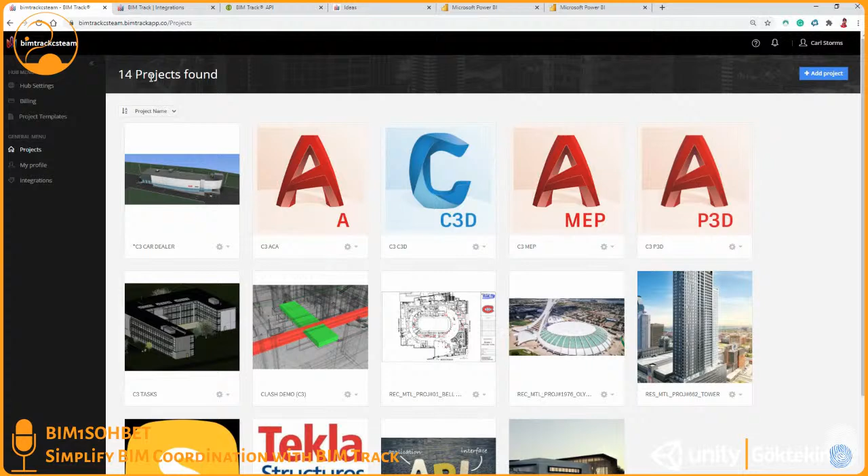So let me just close out of my screen here. All right. So what we should see on the screen now is the BIM Track Hub. And inside the BIM Track Hub, you have unlimited projects. So I currently have 14 projects that I can see, but there could be 100 projects in the hub. So I go ahead and hop into my demo project, and the first thing that we're going to see is our dashboard.

And here we can see all the recent activities. All of these blue links are clickable, so if you see something here you want to address, you can just click on it. We have what we call our mountain range view, and this means that we can see all of the information, how many people have been in the project on any given day, and then how many issues we have to deal with. But the real magic starts when we get into the issues page.

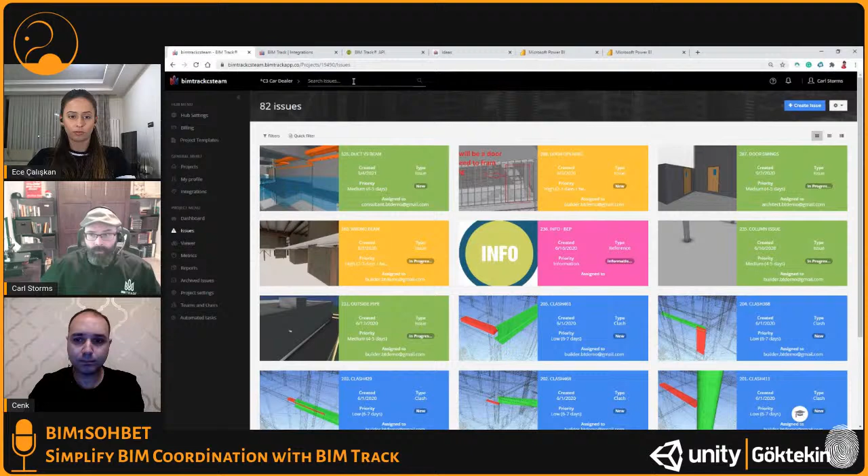So when I open up the issues page, you can see all of the active issues that are in the project. We're over 550 issues in the project, but a lot of them have already been closed and archived, so we're down to just 82 that are still active. And I can just scroll through and find the issues that I want. We can also use that search box to go directly to the issue we're looking for. And whether we type in the issue number or the name or a combination, we can be taken directly to that issue here inside of BIM Track.

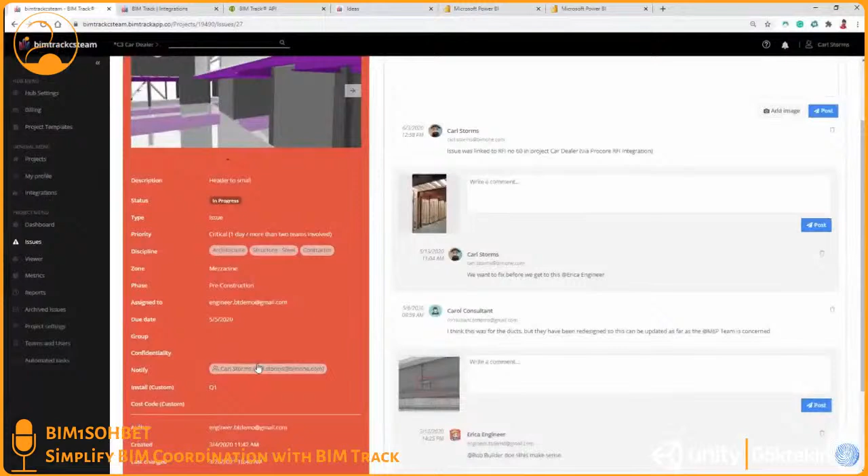And so once we see the issue pop up on the screen, we see the information that's part of it. So we see the image. We also see the XYZ coordinates, so where it was created. The coordinate system for your models is very important, so you want to make sure that everyone's using that same coordinate system. So whether it's pulling shared coordinates from Revit or whether it's part of your coordination process to say everyone should be in the same coordinate system, that's very important. And if you are in the same coordinate system, we're going to see that BIM Track is going to work as expected.

So we have all of the information that we've created when we started the issue. And then over on this side, we have all of the ongoing communication, all of the back and forth, the questions, the comments, the talk that's happened throughout the life of the project. At any time, we can use the @ symbol to bring in an individual person or an entire team into the conversation to make sure we have the right expertise. Along with unlimited projects, we also get unlimited storage. So that means with the attachments, I can bring on any file format that I want and share it here inside of my issue. And that gives access to anyone on this project that has access to this issue.

No, that's great, actually. So it's working very open. But I have a question: how many people can join this web cloud-based system? Are there any limitations about it? Yes, and that's a good question. So the way that the licensing works for BIM Track is it's a named user account. So essentially what that means is that everyone that's part of the project is going to have a license. So whether you have 10 people, 25 people, 100 people, the person that creates that hub, they're the ones that are in control of the licenses.

So that means if you have, say, 10 licenses, and during the first phase of the project you invite 10 people, and after a while we no longer need the plumber, you can take his name out of the project and put in the mechanical guy's name. So you have control over who has access. That's right, to move back and forth. So you can see how that works. So is it good to work with the same team for many projects, I guess? It really depends. For me personally, the more times you work with the same team, the better the outcome is. But we know in reality that's not always the case. And that's why you can switch around. That's right. And so that's why you can have as many projects as you want.

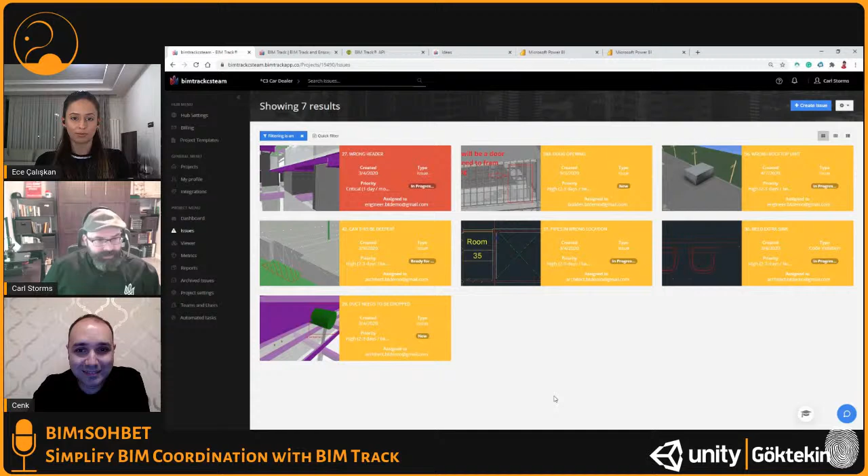Architecture. So that's right. And any way that I can access this, whether it's in Revit or Navisworks, I can see just these, so I don't have to sort through all of my issues on my platform of choice. I can get directly to the issues that I need.

And the one other thing that I want to mention before I move into the add-ins was, along with all of the integrations and add-ins and workflows, we also sit on top of a completely open API. And so essentially what that means is that if you didn't see an integration or a workflow that works for you, you can come in here, either yourself or someone that works with APIs and coding in your firm, and they can use all of this to extract data from BIM Track and put it into their application, put it into their workflow, very much like our Power BI integration.

So not only are we big fans of Open BIM, we're also big fans of Open API, so that you can add in. Yeah, great. That's great, really.

So if we carry on and we look at what it looks like inside of our add-in, so this is our add-in over here. And as we mentioned, we had 8 products where we had an actual add-in. It's going to look the same. So if you've seen it here in Navisworks, you've seen it in Revit, you've seen it in Civil 3D, and that's one of the things we try to keep, is to make everything very simple and user-friendly. So you don't have to learn a different add-in if you use AutoCAD and a different add-in if you use Tekla. It's all the same.

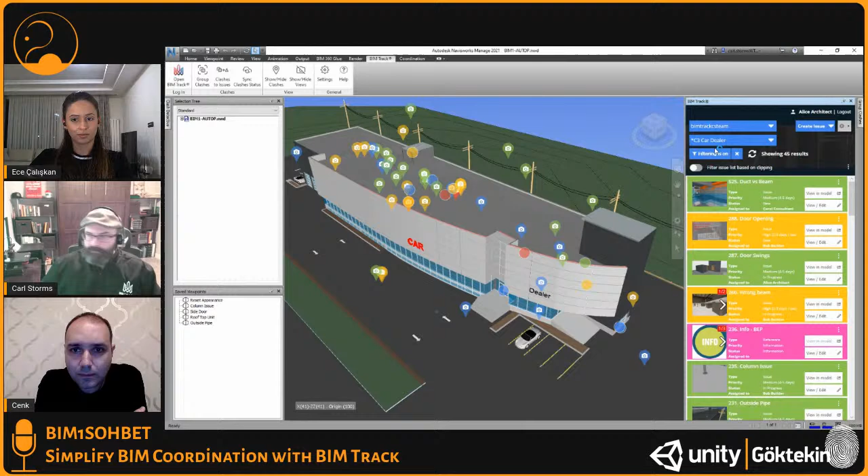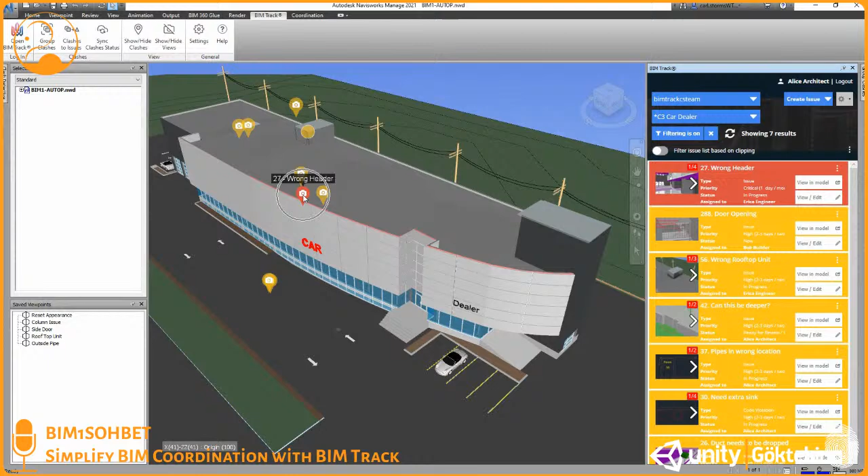And you just make sure you're in the right hub, and then the proper project, and then you see all of the issues available to you. And as we saw before, if I click on that same filter that we saw in the Web Hub and hit apply, you can see that we now go back down to those same 7 issues. Our viewpoints, or balloons as I like to call them, match. And whether I click on the balloon or view in model, either takes us directly to that issue here inside of the model. So it allows us to go directly there inside of our platform of choice.

Now, this is actually very great. I mean, what I like about BIM Track is being able to see problems or the issues without changing your platforms, because many people do not feel comfortable when the interface changes. You can use it in Navisworks or Revit, in the same software that you are using all the time.

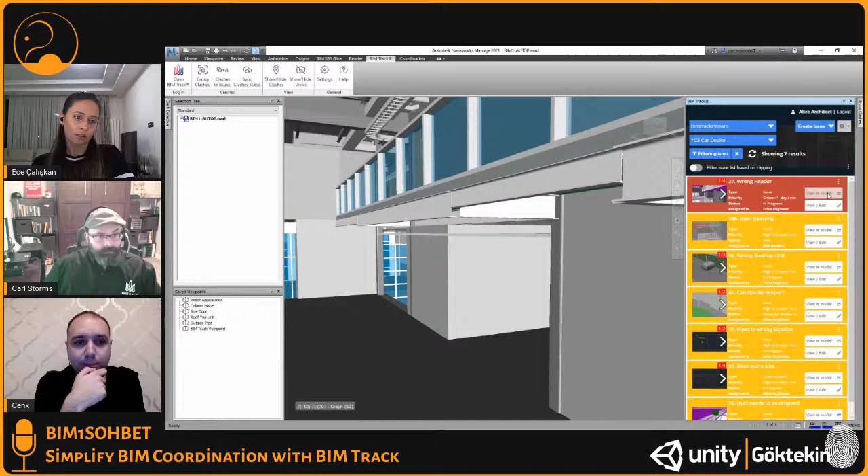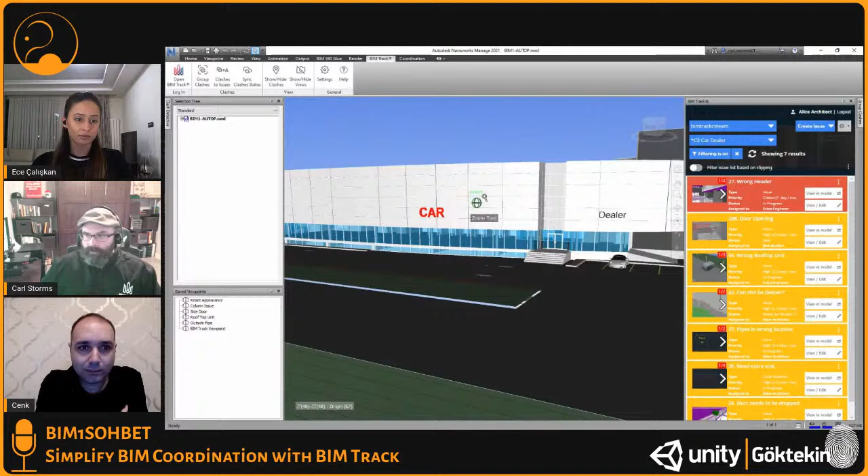Absolutely, and that's a very big part of what we do. It's a little bit different than some other platforms that do similar things: we give you the ability to use it exactly like you said, where you feel comfortable, where you want to use it. And different platforms allow you to do different things. So, when we're looking at something here inside of Navisworks, and I'm just going to turn off my balloons now, we want to typically create issues.

We're not going to solve that header issue here inside of Navisworks. It's a viewing tool. It's a clash tool. It's not an authoring tool. So we are going to create more problems. That's right. So what we want to do is we want to create an issue. And so I'm going to show you how to create an issue with BIM Track.

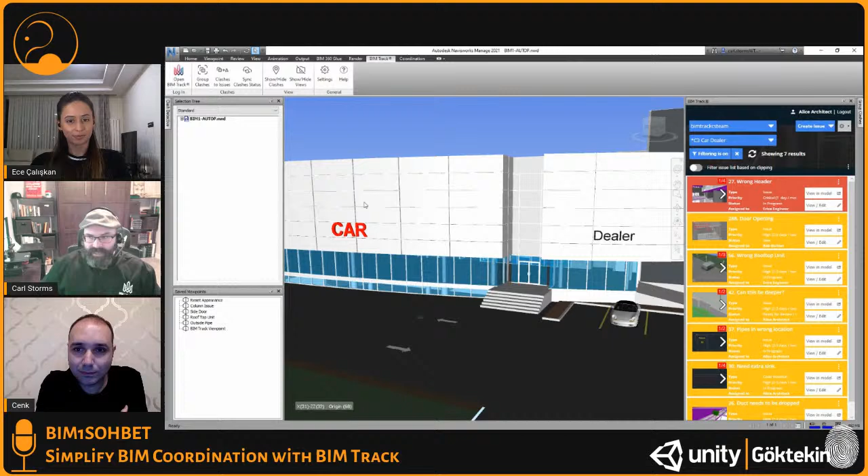Now I'm doing it in Navisworks, but if I was in Revit or if I was in Tekla or even in the Web Hub, it's the same. Again, that's part of the simplicity of our program, is we want to make sure wherever you do it, it's the same process. So we could click create an issue. It's going to take a screenshot, and we get a dialog box, and we put in information. Very simple. Yeah. Now, that's simple, really.

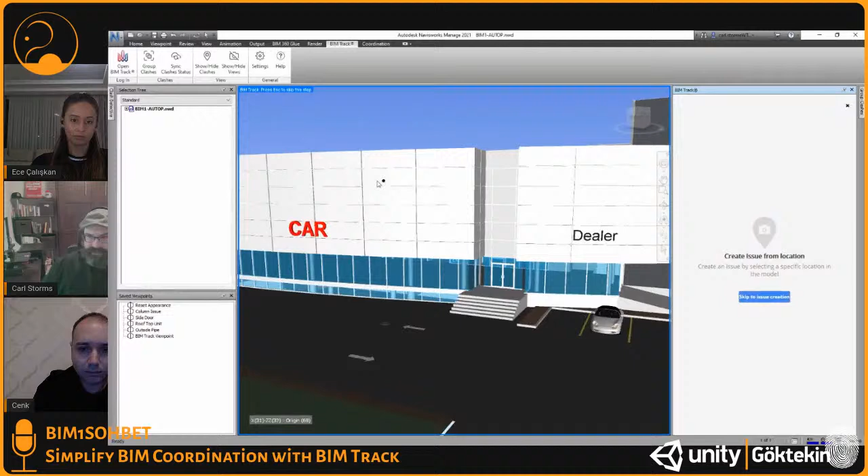Sometimes we need to get a little more specific. So imagine a mechanical room. There's equipment, there's ducts, there's valves, there's all sorts of things in that mechanical room, and we need to get very specific where the issue is. So with that, we can use localize. And you can see there's a tiny little black dot on my cursor.

So if I pick, for example, the top of the A, imagine that's the valve in the mechanical room, it now shows me exactly where that coordinate is, that X, Y, Z. So when I go to that issue, it takes me directly to where that black dot is. So I can get very specific with where I need that issue to be in my 3D environment. The rest of this is the same.

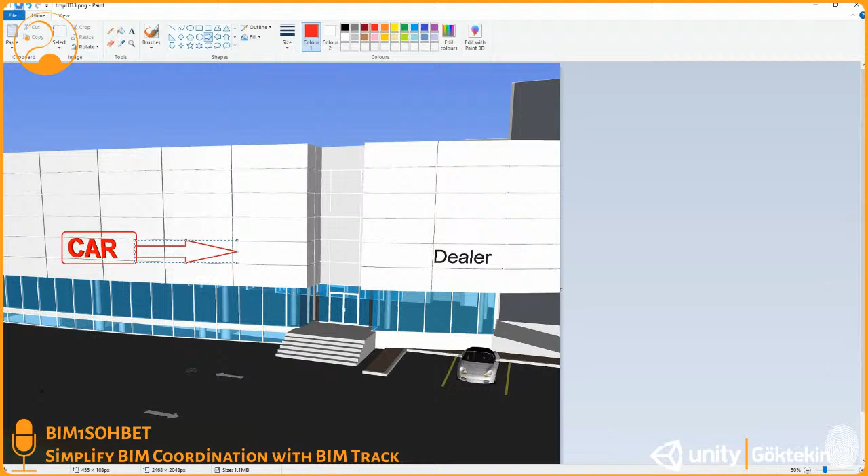So I go ahead and I add in a name, I give in some information. We can do a markup on top of that image. And when we do the markup, it's going to open whatever your default image editing software is. So for me, that's Microsoft Paint. So it's not great, but it gets the job done. So you can see I can add this and put it in place. And the idea is that it's not just a markup tool. So the markup is just there to add context.

The real power is what we can do here. So I can assign this to somebody. So Bob is responsible for this issue. Priorities, what sort of zone it is, a discipline. The more information you add, the more ways you can sort the information later. Due date, notification. So think of this like a CC on an email. So it's assigned to Bob, but the architecture team is very interested to know the outcome. So they want to stay involved.

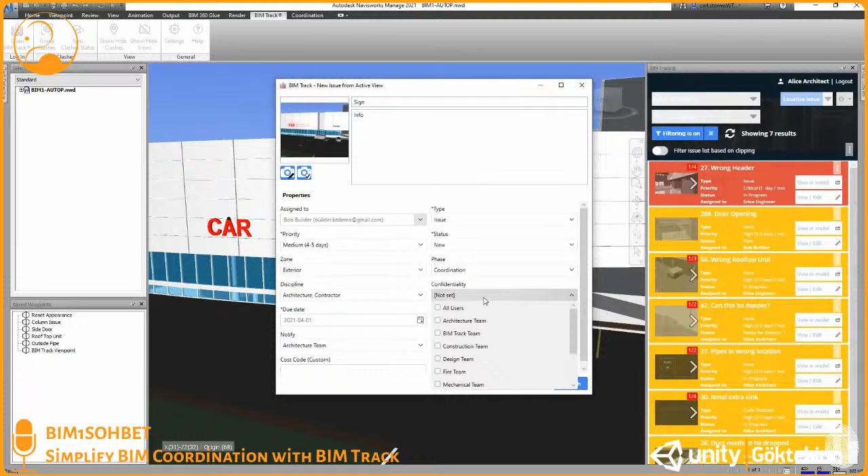And then we have all these other different categories: type, status, phase, confidentiality. Confidentiality is how you decide who's going to be involved in the issue. So it's assigned to Bob, but this issue affects the architectural and construction team. So think of it as the teams involved.

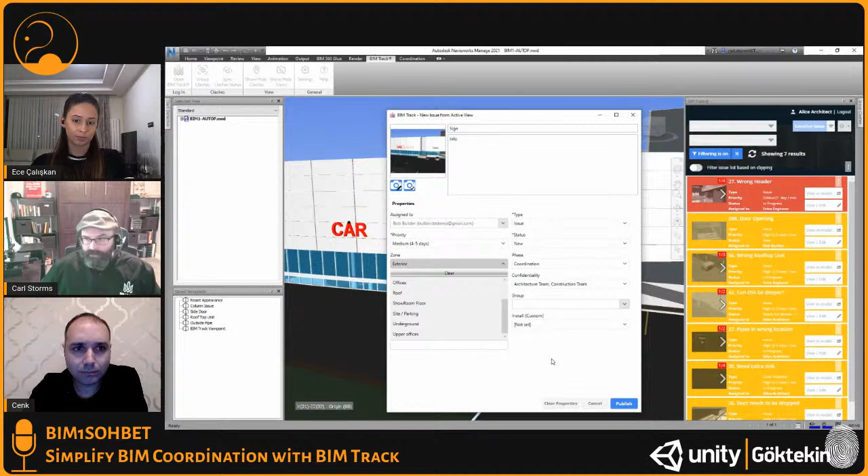And then we have what we call custom attributes or custom categories. And what this means is that out of the box, I can put whatever information I want into zone. But maybe the information that I want to track doesn't make sense being underneath a zone. So I've created a category from scratch called install, and I've input information that I can choose from. You can also create categories like my cost code, where I can type in whatever information I want.

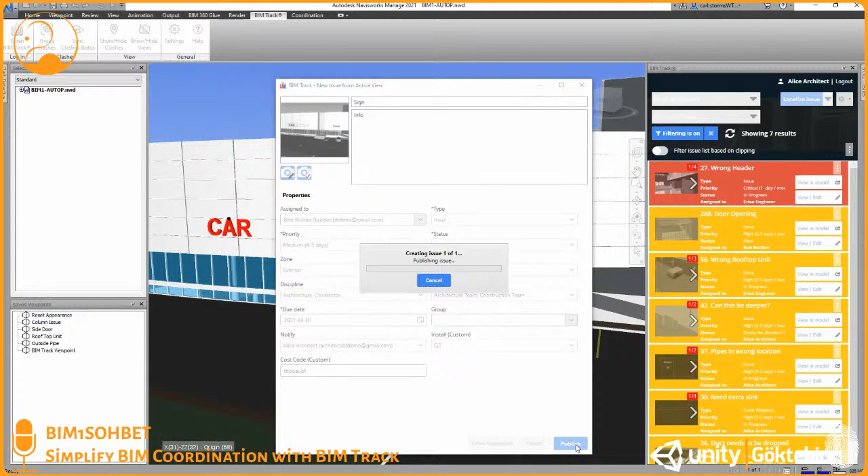And you can create up to 6 of these custom attributes or categories, so that when you're tracking the information you want in your project, it's information that's right for you. And then you simply hit publish. We create the issue, it sends it up to the cloud, and now everyone has access to that issue when we put it into the space. We also have the ability when we're working through here to create issues using our clashes.

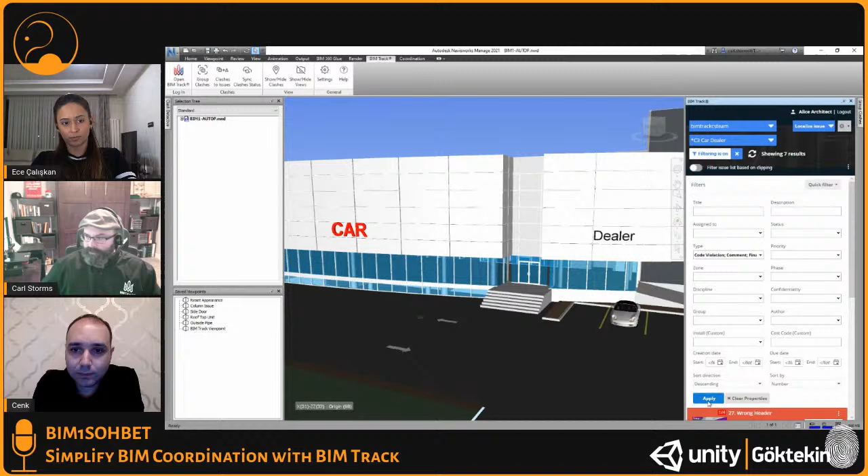Question? So if they would like to switch to any other software, like Revit or any other, they will see those issues in their own software. Correct. Correct. And if I just change out of here to something less restrictive, you'll see that that issue appears right at the top of the screen, right here where we just made it. So it's just that quick. As soon as it goes up to the web, everyone now has access to it.

That's very great. Now, of course, very simple, very easy to use. And that's like instant messaging. Yes, and that's the very, very important part. And I've never heard it called instant messaging, but I like that.

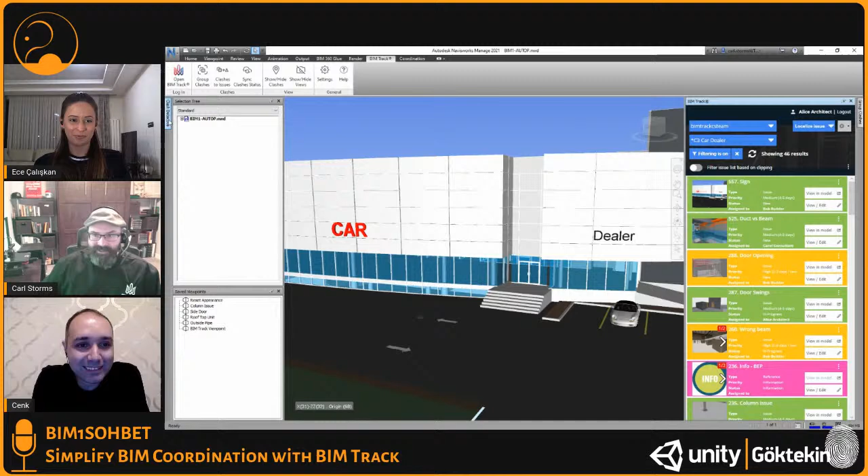When people use Navisworks, everyone knows about clash detection. That's why people use it. We help with that too, though we don't do the clash detection itself, Navisworks does that. What we help with is assigning issues after you've done the clash detection.

If I run this test, go ahead. I mentioned instant messaging because we mostly use emails, but since it's getting harder for us, we've started using WhatsApp. It's not very good, but we want to communicate instantly.

Exactly, there's a need for it. That's why it's a great way to describe it, because it is instant, just like that. But it also keeps track of everything, so it tells you the information right away, but you also have a list of it, so if you forgot, you know you still have to do it.

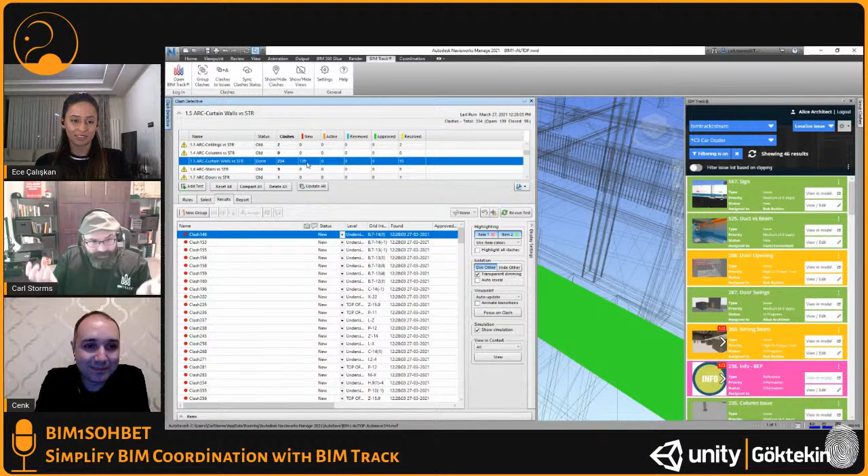Now that we've gone through and run our clash, you can see we have 139 new clashes. For anyone who's worked with Navisworks, you know that sometimes you get clashes that aren't really clashes. A good example: a duct running through 20 joists, and Navisworks says that's 20 clashes, but if we drop that duct a few inches, all the clashes go away.

So people group their clashes, and they can do it manually, or use software like Sherlock or iConstruct. But if you don't have any of those, we include a clash grouping tool inside here. This was actually created by Simon from BIM 42 - if you're familiar with his blog and products, he's the mastermind behind this.

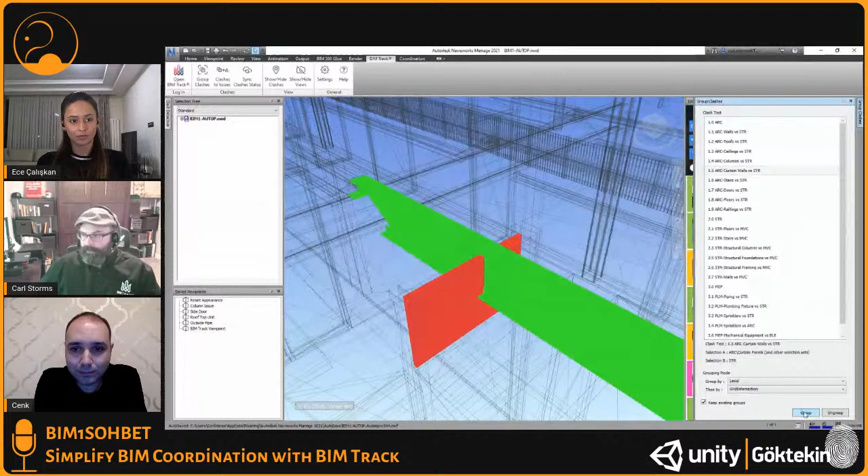If I select that same clash test, I can choose how I want to filter. I like to use levels and grid intersection. I hit group on that, and now you can see we're down to 36, automatically named by the level and grid intersection. So instead of giving 139 issues, I'm now just giving 36.

That's great, it's organizing Navisworks too. It's very important for us because we have lots of clashes and not enough time to fix them all, but now it reduces and tracks those clashes. That's really great. Yes, and that's part of it - by grouping them together, when you have time to go back, you can address all of those.

What we do at this stage, now that we've grouped them, is select that same group and choose the information from Navisworks we want to put into our descriptions. Anything with a blue check mark comes from Navisworks and goes into the description inside BIM Track. Then we hit publish, and we create those 36 issues.

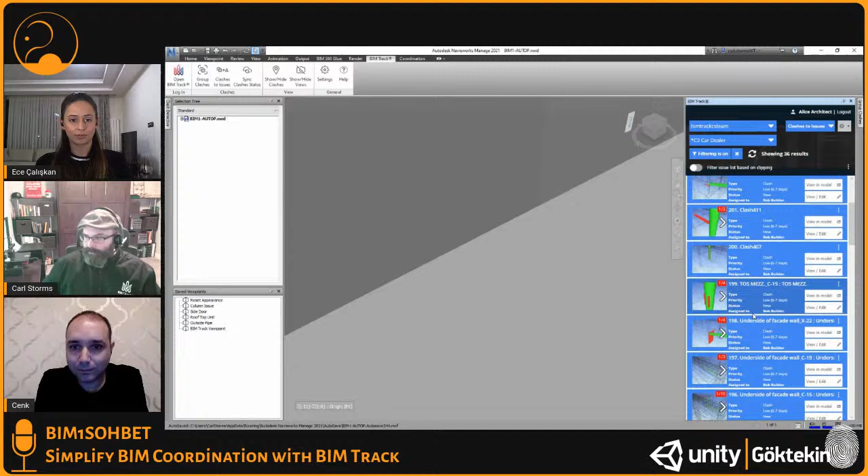I've already done this, so we'll take a quick look at what one of these groups of clashes looks like. You can see this one has 1 in 10, so it has 10 clashes, and there's an image for each clash, based on how your Navisworks is set up. Everyone likes it to look a little different, but there's one image for each clash.

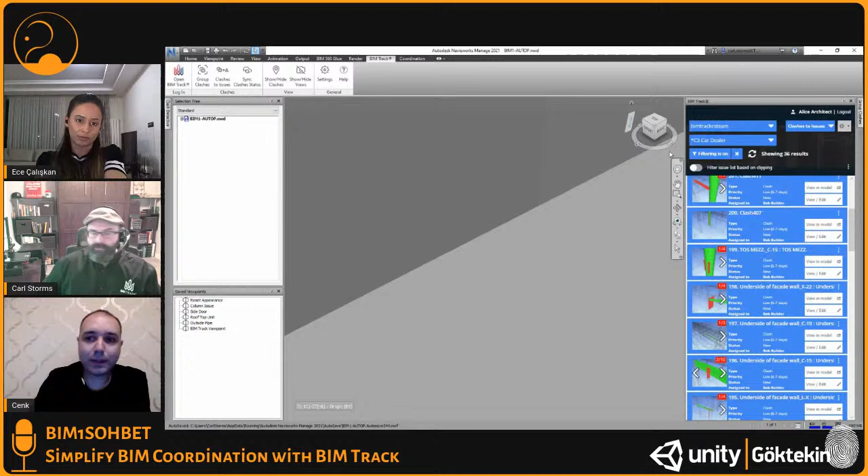If I go into the view to edit, you can see here's that information from Navisworks inside each clash. So it really gives you that functionality. Did anyone have any questions about the Navisworks side before I hop into Revit?

Actually, no, we still have enough time. Please go ahead.

So when we hop into Revit - and I'm using Revit here, but it could be Tekla, Civil 3D, any of those products, same idea - you can see we have again that same information, all the issues. And now I'm logged in as our engineer, Erica.

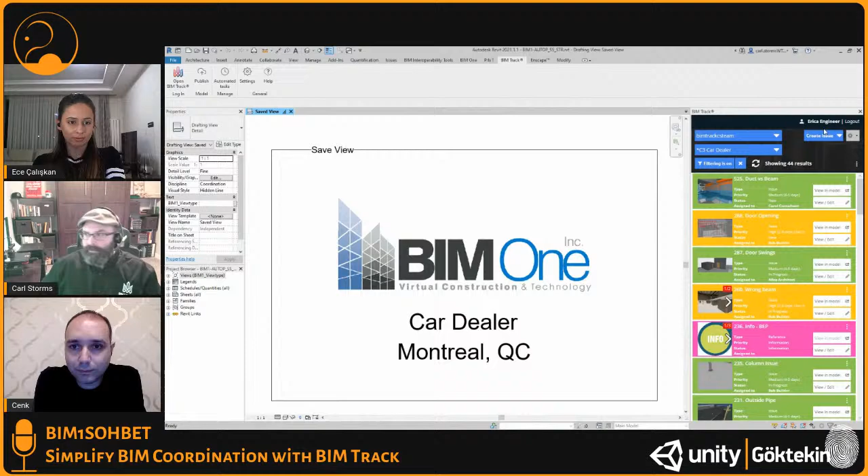One of the things she does is have it set up with her own filter. If I go into quick filters, you can see underneath personal, she has her very own filter. She comes in the morning, grabs her coffee, opens up Revit, and now these are the issues assigned to her in order of criticality, so the most critical issues are up top.

And this is, of course, that pesky wrong header issue that we saw before. So when I click on that, it's going to open up the issue. We saw this in the web, we saw this in Navisworks, and now we're going to open that same issue here inside of Revit.

The difference is that Revit is an authoring tool, again, like ArchiCAD or Tekla. So that means that when the issue brings itself to us, we can now address it and make changes to it. And this issue, we have a pretty good idea what's wrong, but not all issues are going to be easy to see just from looking at it.

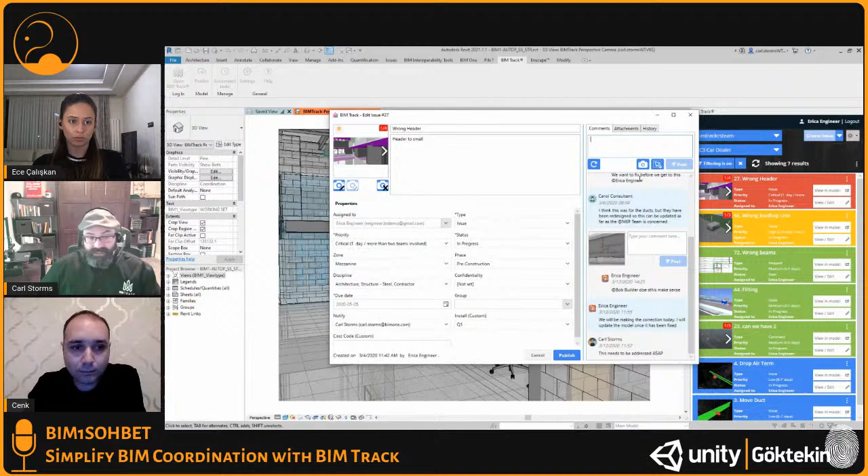If you go into View/Edit, everything that we saw on the BIM Track web is available here inside of Revit. We didn't have to leave to go anywhere else, we didn't have to load a different software. Everything is here for us. And now we can say, okay, I understand what the problem is, I can fix that, and then we do just that.

So I can select on the beam here, and it tells me that it's a 12 by 16. So if I come in here, I can make that change. And so I'm fixing the issue. It's a simple issue, but again, this is one less thing that I need to do.

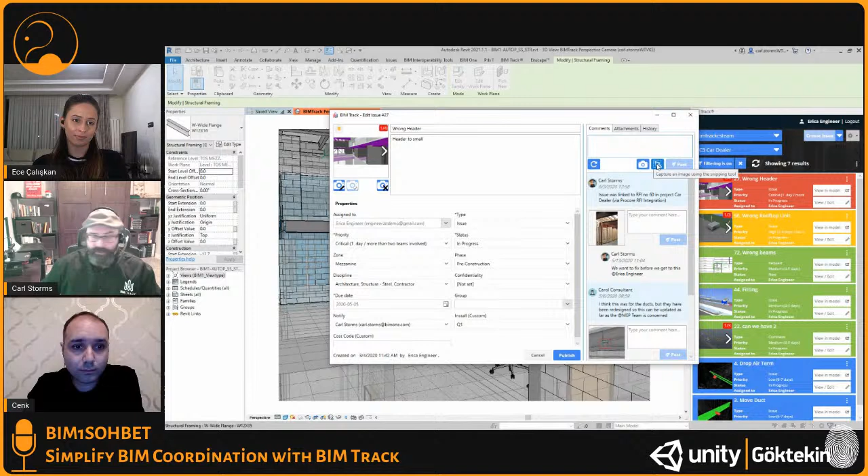So now that I've actually fixed the issue, we can document this. We can document it for the rest of the team. So what I do is I come back over here and I can add information into the issue for the rest of the team. I can take a screenshot. So when I tell them what I did, I can also show them what I did.

So I took this picture, I fixed it with a W12 by 16 header, and I post that for the team. So now they all know what I did, and they have a picture of it.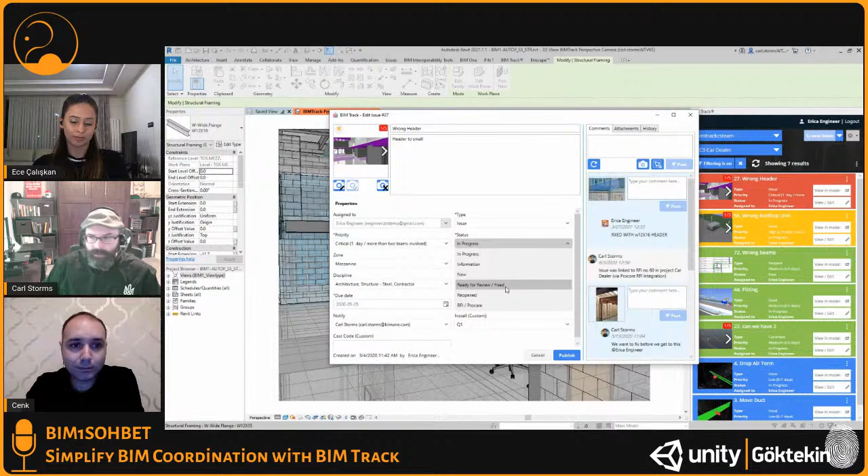And then, most importantly, we want to change that status to ready to review fixed. Now we do recommend that you keep the close status to the project coordinator or the lead, because we don't want people closing their own issues, but also it means we have a chance for someone to take a look at the issue and make sure that it's the right solution for this project.

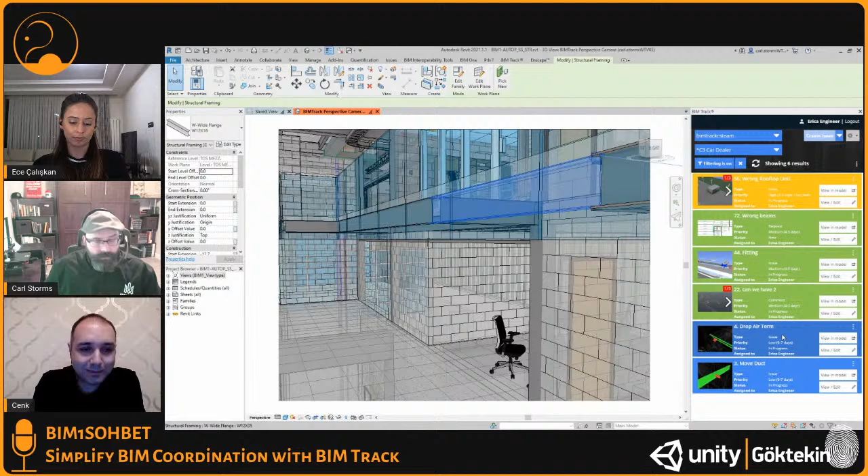The other cool thing about Erica's to-do list is now that she's fixed the issue and published that, it disappears from her list. So now she can just do the rest of the issues. She can add issues, she can create issues like we saw in Navisworks, she can communicate with the team like our instant messenger analogy. All of that's available to her here without having to go anywhere. So that's one of the real powerful things about our add-ins is you use it where you need to use it.

That's good, and she can enjoy her coffee too. That's probably the most important. That's right.

But of course, we know that not everyone is going to be using Revit or Navisworks or what have you. So you may have the owner, you may have the site super, and so they can do all of this on our web browser.

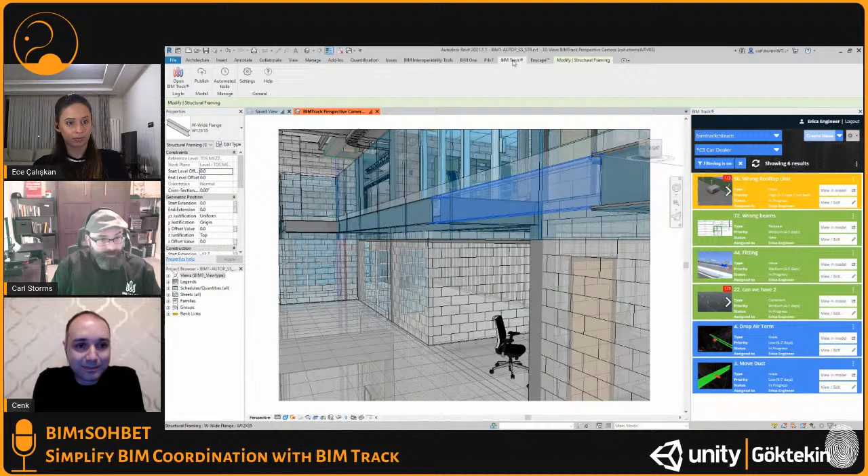And the easiest way to get the information into the web browser is by publishing it from Revit. So here, we can publish our model or models as IFCs, again, open BIM platform. And then we can publish our sheets from Revit as PDFs. So I select them all.

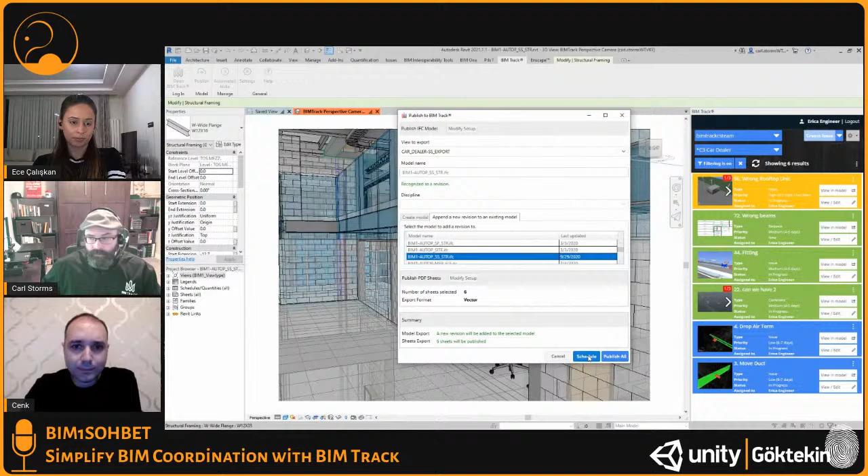And while we can do this once, we can also automate the process. So if I schedule this, that means that I'm going to call it my structural steel. I'm going to publish it weekly on Sunday at 11 o'clock at night. I hit save, and so now every Sunday at 11 p.m., it's going to publish that model in those sheets.

The only thing you have to remember is the computer has to have power at 11 o'clock Sunday night. It'll open Revit and do everything else, but there needs to be power. So maybe Wednesday at noon's a better time. Unless you like working at night, then hey, there you go.

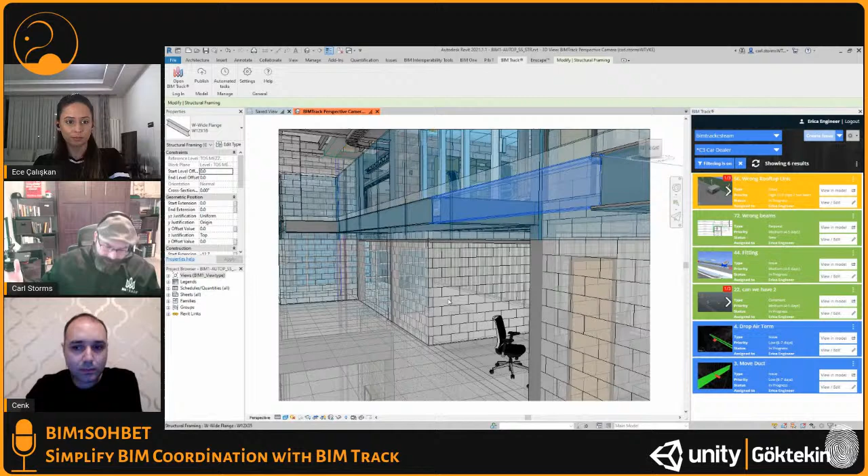This is a great feature. I mean, exactly, we will be sharing model once a week. Then sometimes this period goes up to a month because we are always busy.

Yeah, great. Now, the thing to keep in mind is that this is just sharing the IFC. The Revit file, you guys are still going to coordinate the same way you do.

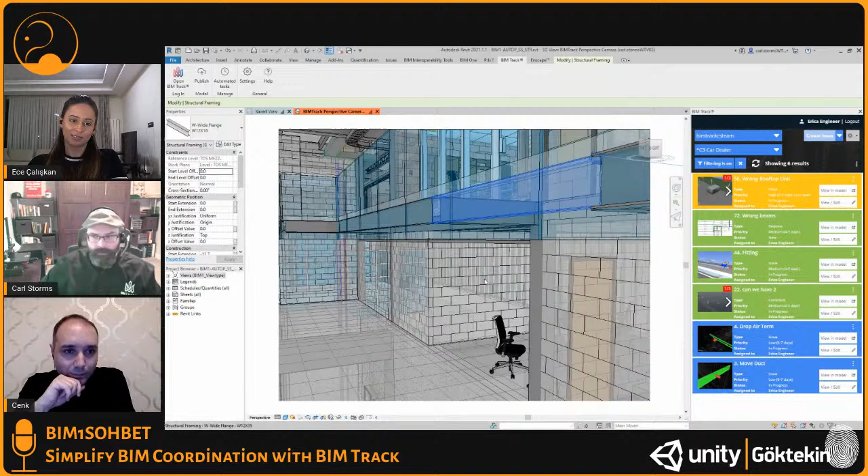So you still have to upload the Revit file to BIM 360 Design or wherever you're storing it for the authoring tool. But this allows everyone to see the contents in our viewer.

If we come back into the Web Hub and go into our viewer, this is where we can see, in this project, there are 6 IFCs that make up the project. You can see all of the IFC files, and our structural one has 17 updates or revisions. We have access to all those revisions - unlimited storage, so we can access all of these. The most recent is always on top.

If you're working with another consultant that's not using Revit, let's say Tekla for example, they can just come here, click Add an IFC, and drag and drop in their IFCs from wherever they want.

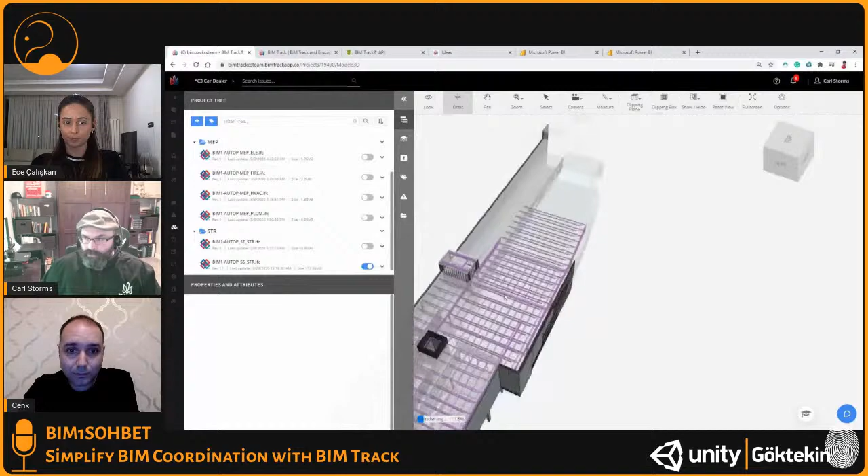So now everyone on the project can view these IFCs. To view them, it's just as simple as hitting the little slide, and it's going to open up the model for us to see. Again, no software needed for this - you just need access to the internet. You can see we can move around, zoom in, pan, all the things you can do on regular browsers. We can clip, measure, all that stuff.

We also have the ability to add what I call profiles. What that means is you can see my slabs, my IFC slabs, came in transparent, and my beams came in purple. I didn't change that in Revit - that's a rule I have here for easy review. So if you want to set things up kind of like your profiles in Navisworks, every time I bring something in, it's easier for me to review.

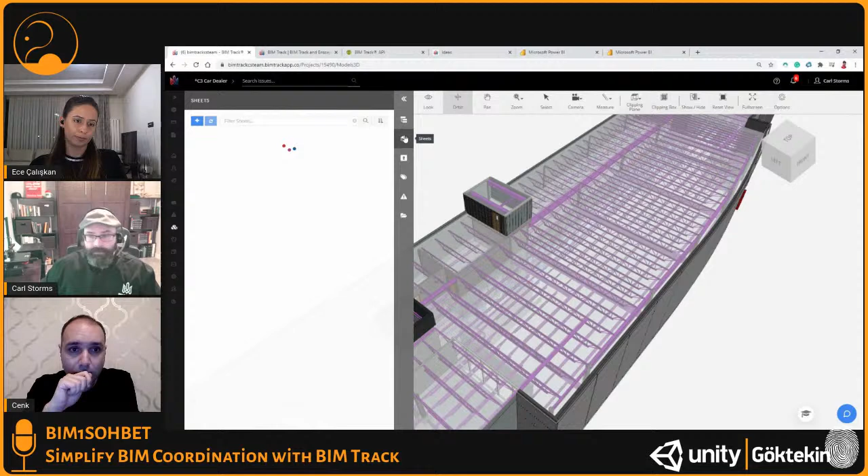Same thing with my sheets - these are PDFs that came into the project. They don't have to be from Revit. This is a rooftop unit from Trane, there's 228 pages. But we do have those sheets that came from Revit.

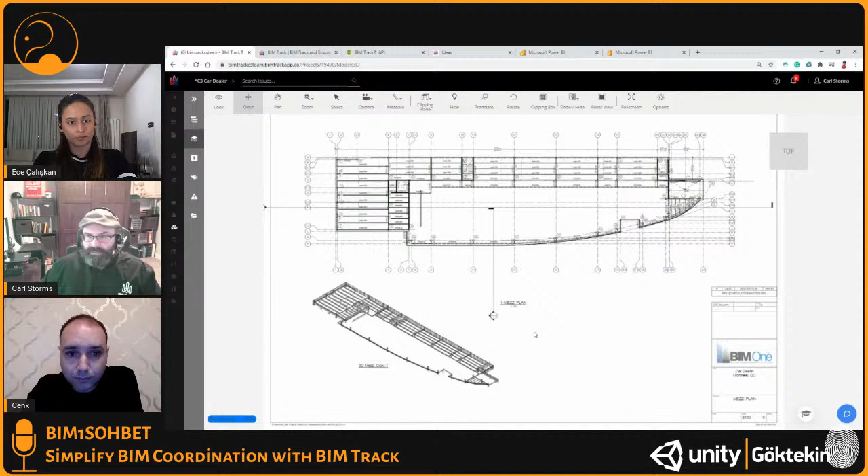This is that cool feature I was talking about before - if I turn on the sheet from Revit and the model from Revit at the same time, we go into what we call hypermodeling. Hypermodeling means we can see the 2D and 3D content in the same place at the same time. So as I zoom in, there's my grids, my beam tags, my notes, all of the information.

And I can also give us a good presentation about it - very nice. Now we can move this back and forth, I can do whatever I want. And those people that aren't using Revit, they can do this anywhere they have access.

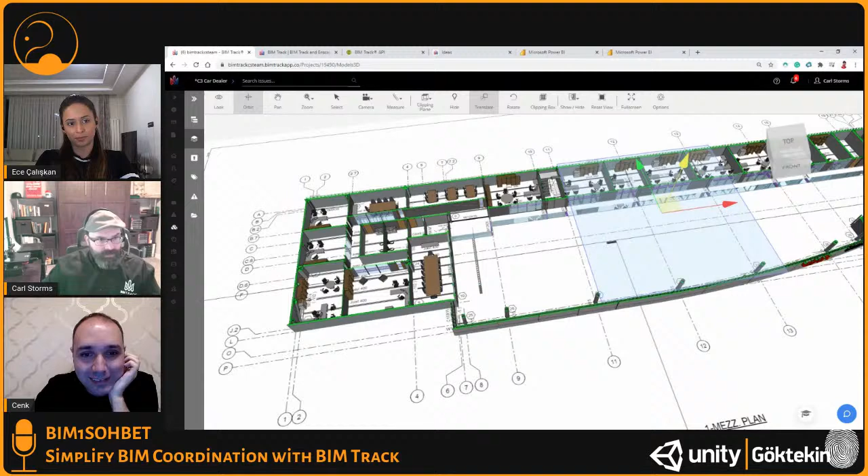And if they click on our issues, they can now see issues, review issues, create issues. So everything that we did in Navisworks and in Revit, anyone that has access to BIM Track and any viewer can now do this as well.

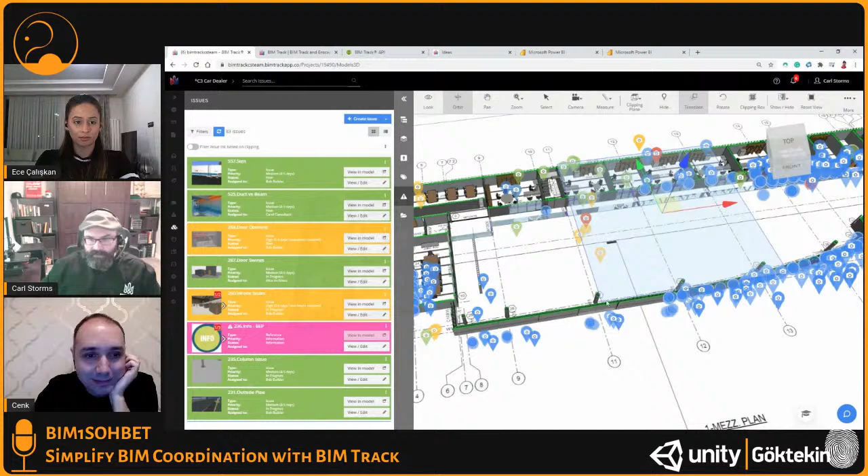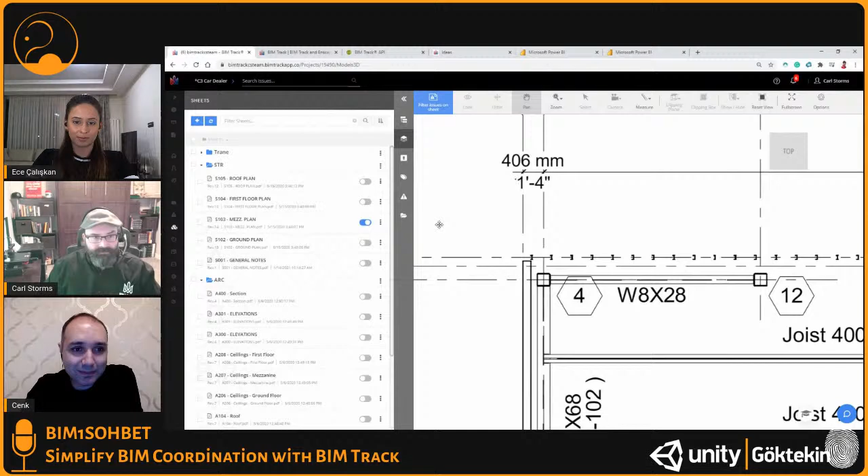And we see it here in this 2.5D environment - I say 2.5 because it's 2D in 3D, but we could also turn off the model and go back into our sheets, and you can see we can create and review issues strictly in 2D. So all of that's available in 2D and 3D, whatever we need to do. We sort of work with the workflow that works best for you. That goes back to the question of, can we work with 2D? We're designed to work best with 3D, but we certainly do have 2D workflows.

The last little bit before we open it up for questions is, of course, all of the metrics, all of the intelligence that comes from all those issues that we create. You can see I click on the metrics and we have access to all of this information. We can filter by any category, including any of those custom categories we created specifically for our project. So if I go to disciplines, you can see all the disciplines here.

And it's still early for me here in Canada, so I'm going to go ahead and open up a donut instead of a pie, and we go to our architectural issues. Now we can see what's the priority of these issues we've picked. There's a lot of high issues, so I want to investigate those. And now we see that a lot of the high issues are assigned to Alice, and she's on vacation this week.

So I can now assign some of them to Bob, or maybe Erica, or maybe both. Working. Well, exactly. And the idea is that I can action this. It really only took 3 clicks. So I found exactly what I needed to do in 3 clicks. So all of the information is in the project, but I got really to where I need to be. And it's okay, sometimes people take vacation, so we'll let them have their vacation. Bob and Erica will take care of it.

But once we get past the idea of being able to do this at an individual level, we also mentioned that we had the ability to tie into Power BI. And with our Power BI integrations, we take that from just looking at a single project to looking at all the issues inside of all of our different projects.

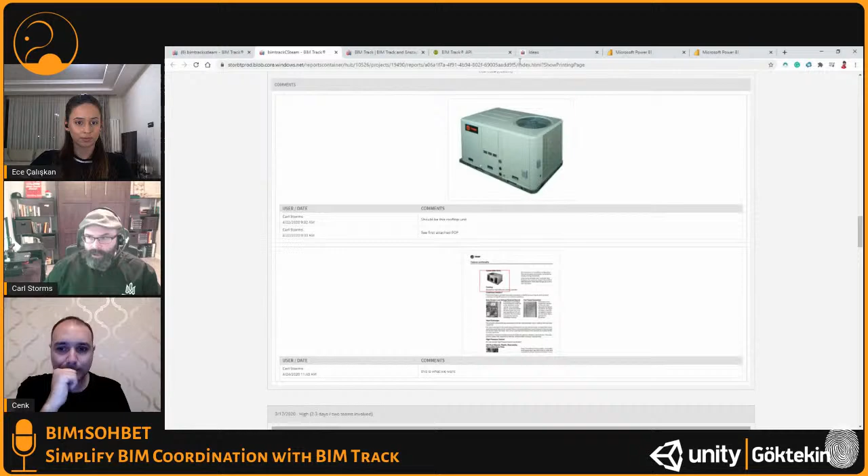And what it looks like is when I hit print, you'll see the website that we have here. Let me just refresh that so we get the graphics. So we get the website. If you prefer, you can also save it as a PDF. But you can see that all this information is clickable. So I can find out any of the data. I can drill down into any of the analytics. And then we get down to the actual issues. We see the image, the information we added, and then the comments. This is all of the back and forth that's happened over the life of that issue for us to see.

And if we decide during our meeting that this issue needs to be addressed, we can simply click on the title. This works whether we do it from the website or from that PDF we created. And now we're right back into BIM Track at this issue, and we can ask the question, hey, Bob, where's our dryer? Where's our rooftop unit? It's on back order. There's a ship stuck in the canal, so we can't get our orders through. And then we go ahead and post this. Everyone can see it. And we've addressed that issue.

So we didn't have to send around a thumb drive with the models on it. Everyone had access in the viewer. We didn't have to spend the first hour to coordinate the meeting because everyone got the report the day before. And you can have as many reports and templates as you want. So we're able to all sit in one room and look at this on a screen, or as we are here all over the world, watching it on YouTube, and we can all be part of this conversation. And we're getting our information done quicker, and then we get back to the field where we need to be.

So I know that's a lot of information kind of coming at you really quickly about what BIM Track can do and how it sort of helps. But the real takeaway is that we're trying not to change your workflow. We're trying to have a simple product that allows you to do what you do the way you want. We're not replacing the cake. We're adding a little extra icing to the cake. That's how we like to look at it.

That was a very good presentation. I really like it. I would like to say something about it. When you finished this presentation, I was working in Navisworks with lots of clashes, but I didn't see it. I have a problem with that, because when I see BIM Track, I know I have a very serious problem with Navisworks. It's because it's not a user-friendly system. I have lots of difficulties with tracking, with showing the clashes, lots of software.

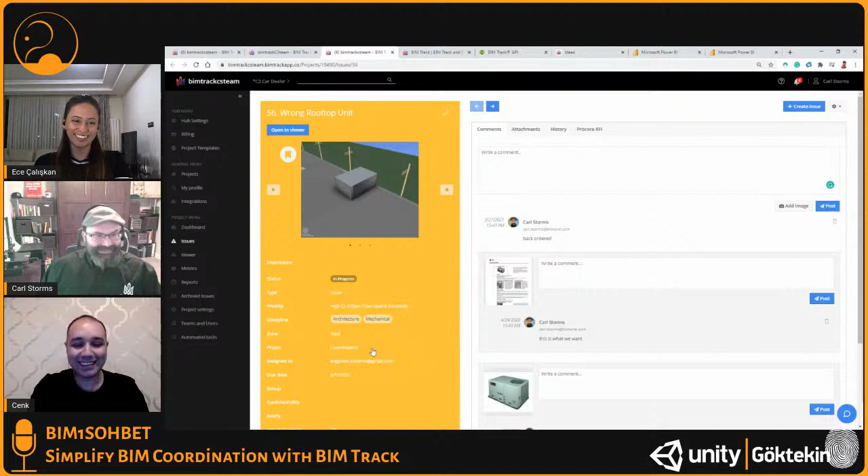But now I get it. I have a problem, and this problem will be fixed by BIM Track. So I really like the software and the presentation. Thank you again, Carl. You're welcome, and I'm glad to hear that we helped to solve your problem. Thank you. Okay. Thank you very much.

Before moving to Q&A, I just want to ask you one question. Actually, I was checking your website, BIM Track. I saw a case study part on the website. Can you tell us about it? Sure. In the case study part, there's lots of different case studies. We have several on there. Some of the most recent ones talk about the benefits that people get from working with BIM Track. Some of them use Power BI. I was thinking of our DPR webinar that we just did, where they talk about integrating with things like Smartsheet to be able to track their schedules.

But we also have people that use BIM Track and how it saves time during their coordination process. And one of the things they said is that even if you're tracking something through Navisworks, for example, the process of being able to assign that issue, know where it is, find it, and correct it saves you a minute each time. If you're dealing with 1,000 issues in a project, that's a couple days' worth of time that you save from something very simple.